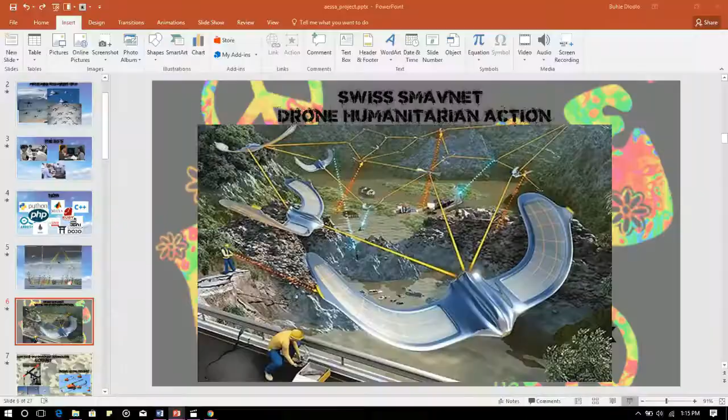The Swiss SMAVNET project was born of the idea of sending out many mini UAVs to a site requiring assistance ahead of human personnel. This may include scouting a building out before firefighters try to save lives, or even locating victims of natural disasters. The drones in this case would be surveillance, search, and rescue drones with a mission profile consisting of mainly a launch, dash, search, and a return home stage.

Recently, the United States Navy has introduced the LOCUST project, and the Army has introduced the PERDIX project to work on swarming technology.

The existence of such swarming technology could almost be seen as an unfair advantage over the enemy. Advantages include allowing for multi-mission operations all at once, larger surveillance areas being covered simultaneously, more enemy vehicles being engaged simultaneously, you having the upper hand of psychological warfare since you'll be overwhelming the enemy, as well as spending less money than on a conventional UAV.

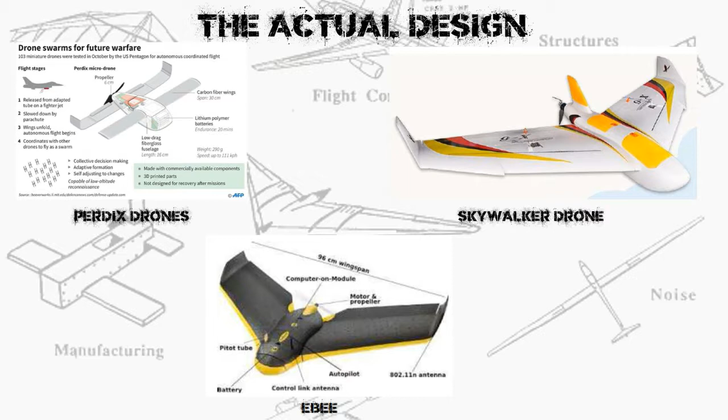Following the call for a weaponized swarm, it was decided to design for military application. In order to design a highly competitive swarm attack UAV platform, the three very best UAVs in the market were analyzed. These include the PERDIX drone, eBee, as well as the Skywalker X6 drone. The competition analysis led to a PRS aimed at achieving the best performance that could be given.

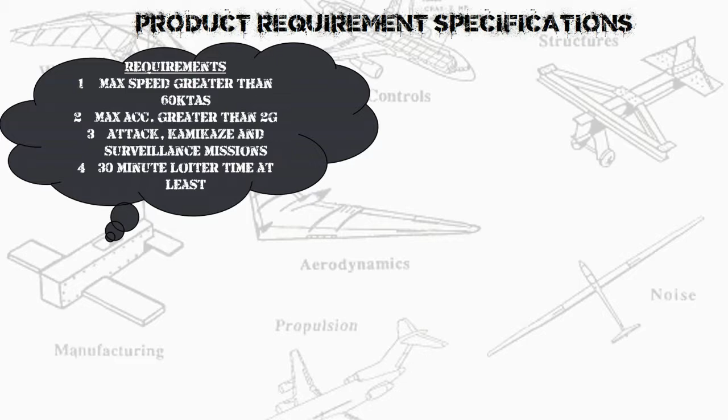The UAV is required to have maximum speed greater than 60 knots, maximum acceleration greater than 2 Gs, perform attack, kamikaze, and surveillance missions, as well as achieve a 30-minute loiter time at the very least. This is to be achieved under the constraints of a maximum launch altitude of 25,000 feet. It should be capable of a sky launch, and the dimensions should be no bigger than a mini UAV. Criteria is heavily performance-based, with things such as low mass, best endurance, best range, ease of manufacture, and low cost, just to name a few.

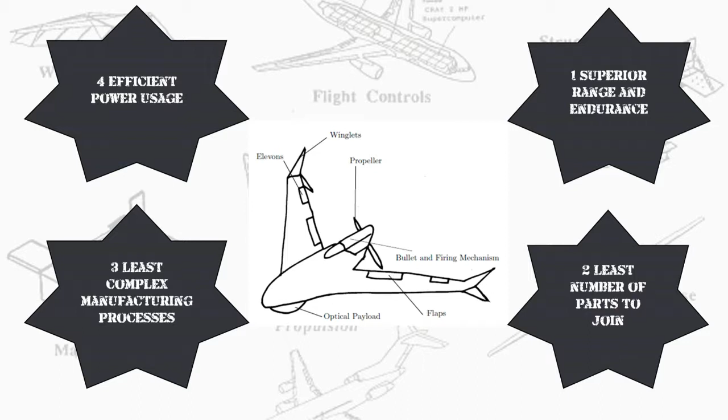To ensure that the very best aircraft configuration was developed, 4 completely unique concepts were designed with enough detail to compare against the performance-based criteria. These included a quadcopter, tail sitter, flying wing, and a gull wing concept. Comparisons show that overall, the flying wing would be the best option due to its superior range and endurance, least number of parts to join together in manufacturing, least complex manufacturing process, as well as its power usage, which was found to be very efficient. The flying wing was thus developed further.

Considering that the aircraft will be in a mission requiring both attack and defense, it was decided that the dash speed of the aircraft would be the design point of this project. Seeing as the maximum speed is directly affected by the specific excess power, the SEP equation was manipulated so as to give a procedure that helped obtain the required wing reference area. The procedure was as follows.

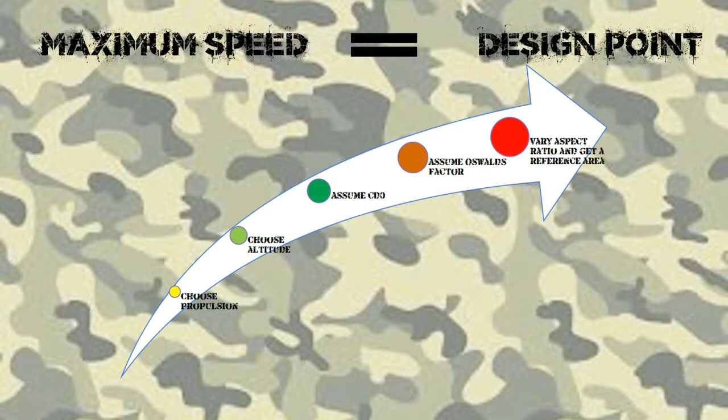First, a form of propulsion was chosen. Then, the altitude of flight was chosen. A CD0 was assumed. An Oswald's factor was assumed. And finally, the aspect ratio was varied until the right reference area was found. After optimization, it was found that the best aspect ratio was 5, giving an SREF of 0.038 square meters and a wingspan of 0.435 meters.

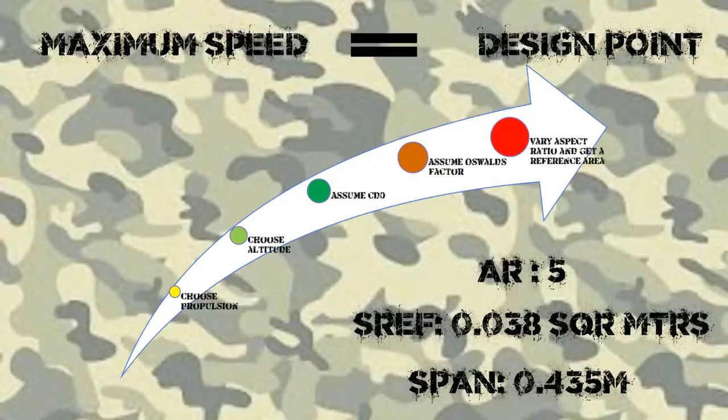To solve this problem, conservation of energy and conservation of momentum equations were employed to find the thrust required for the UAV to reduce speed by no more than 5 meters per second. It was decided that the firing speed would be 26 meters per second, and the thrust required was found to be 1.6 kilograms. The chosen motor had to fulfill these requirements.

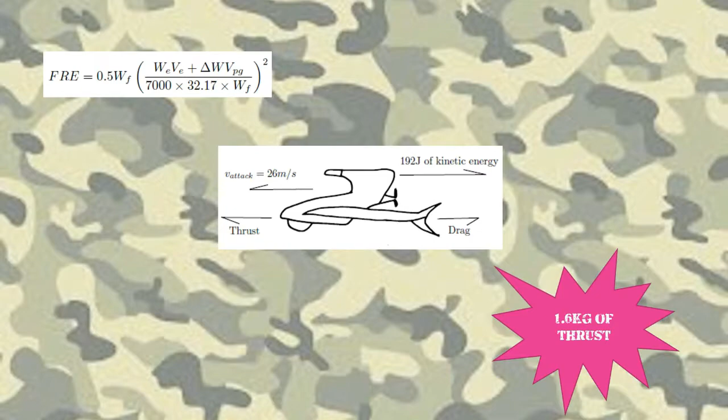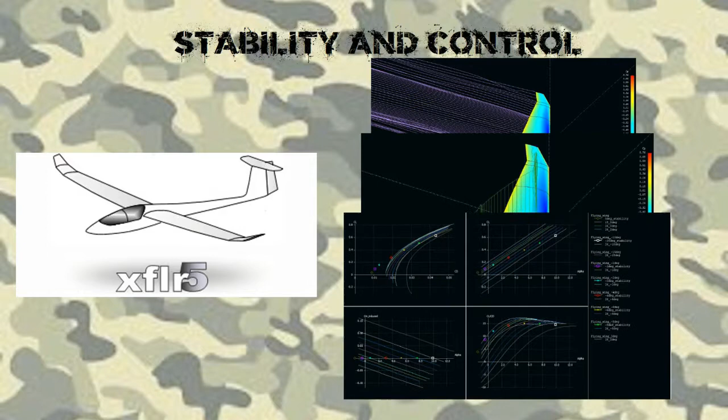The next challenge was ensuring that the aircraft was stable in both the longitudinal and lateral direction. Using XFLR5, whilst fully aware of the limitations, the stability and trim conditions of the UAV were analyzed. The UAV was found to be longitudinally stable, but laterally unstable in terms of Dutch roll and slow spiral modes. This was due to the complete lack of yaw damping caused by the absence of a vertical fin. To counter this, it was decided to add rudders to the winglets of the UAV.

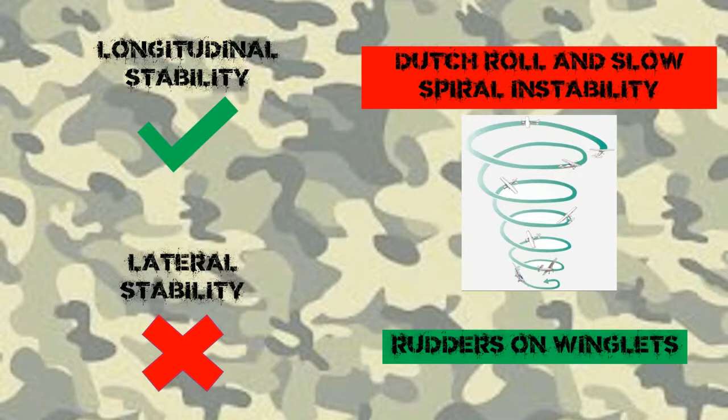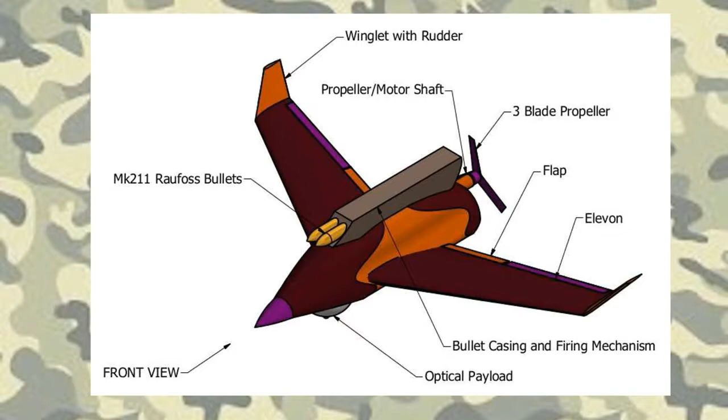Once analysis was complete, the final configuration of the UAV looked like this. As shown, the UAV makes use of a 3-blade propeller, has inboard single-slot flaps, outboard elevons, an optical payload, and Raufoss rounds as ammunition. The complete specifications are as follows.

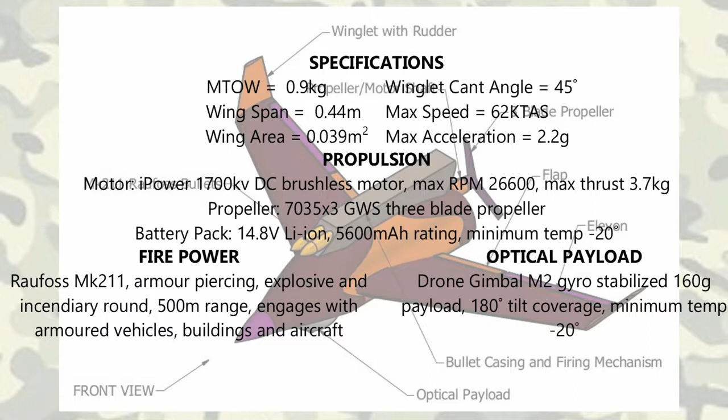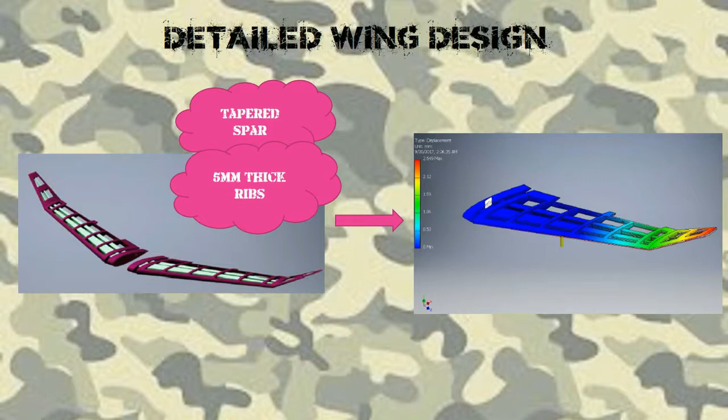The mid-level design phase focused on detailed wing design. The structure of the wing included 2 tapered spars as well as 5 mm thick ribs all along the wing. An FEA analysis that was checked against hand calcs was used to ensure that severe loads shown anywhere in the V-n diagram were fully supported.

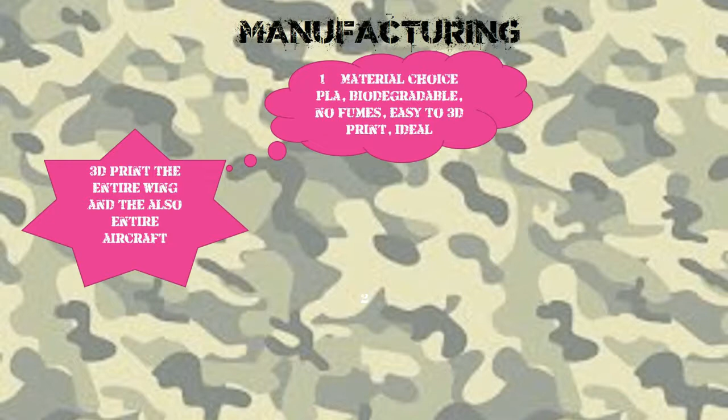Considering that the entire swarm is meant to be as inexpensive as possible, it was decided that 3D printing was the route to go. When it came to material selection, PLA was found to be the filament of choice due to its biodegradable nature, lack of fumes during printing, as well as mechanical properties which made it ideal for this application.

The real challenge, however, was figuring out how to 3D print the entire wing as a single part when it had overhang parts which would require the nozzle to deposit filament in mid-air. The Autodesk Meshmixer software was used to design printing supports which fixed the problem.

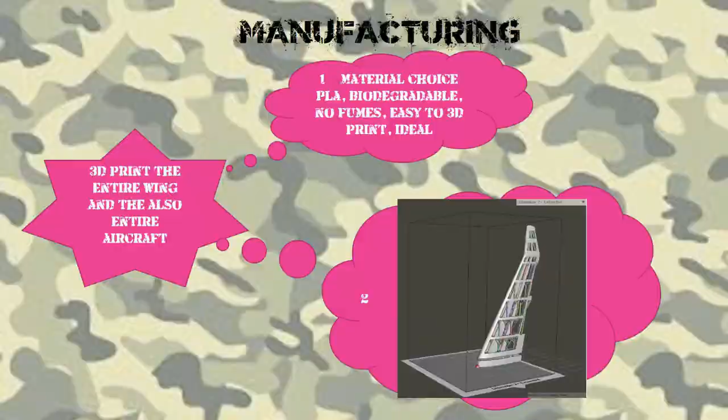The combination of using off-the-shelf components such as servo motors, cameras, bullets, and batteries, together with 3D printing the entire airframe and using friction welding to join parts together, led to a total hardware cost of the UAV swarm being 2.44% of the total cost of a conventionally sized UAV.

This means that over and above the possibility of multi-mission operations, covering larger surveillance areas, engaging with more enemy vehicles, and having the upper hand in terms of psychological warfare, the military saves up to 97% on the total cost for hardware alone, where you would usually spend much, much more.

Many advantages come with these savings in cost. Firstly, part of the money saved can be put to use in the form of humanitarian aid. This allows the military to be of more help to countries that have been hit either by natural disasters or countries that were casualties of war. They can also give greater support to organizations such as Doctors Without Borders and Engineers Without Borders.

It also gives the state the power to make military personnel earn better and take care of their families, funding their children's education and ensuring health care for all the personnel. All to better thank the men and women that bravely lay their lives down to protect their respective nations. Switching to the swarm attack UAV option means a win not only in times of war, but in times of peace as well.